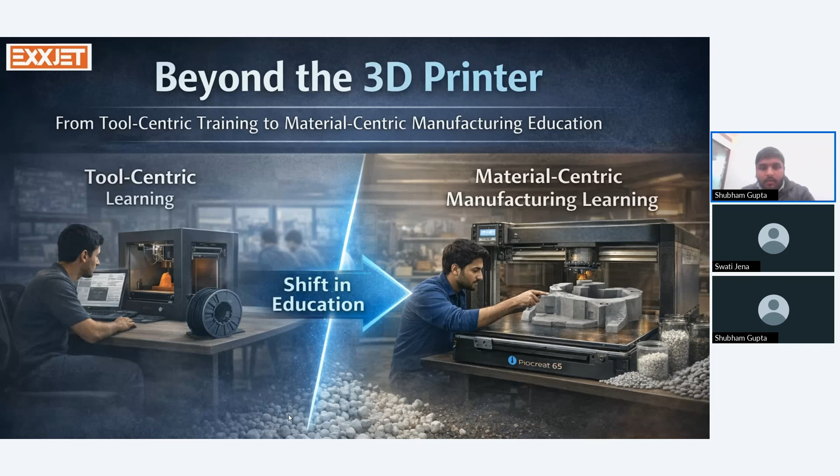This is 3D printing in education. Today's scenario is a very common sight across institutions. Many colleges have already established idea labs, fab labs kind of facilities, and usually such facilities have one, two, or sometimes more small FFF 3D printers. Within this setup, most engineering students learn about basic machine operations, like loading material into the machine, and applying different slicing parameters.

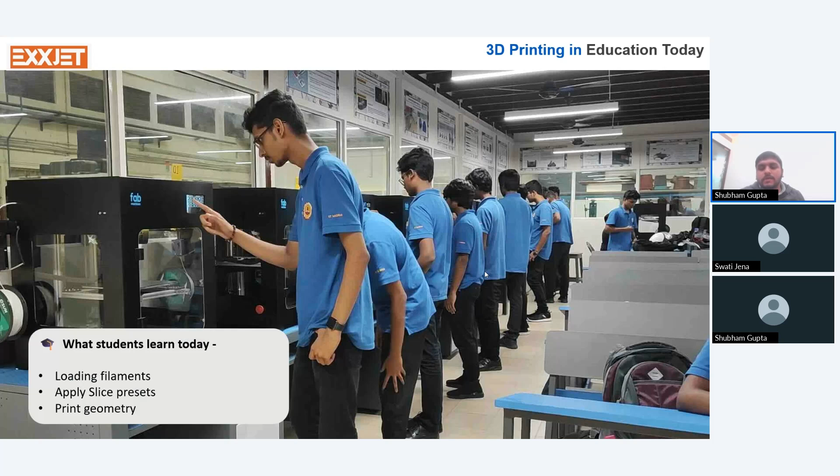So depending upon the slicing program they are using, they do basic printing of basic geometries. But what they're missing is also a very important point here. They never get a chance to handle the basic raw material, the feeding material which they are giving into the 3D printing machine. They never get a chance to handle the raw source of that material. They don't really see how the material behaves under different printing processes. If they change a certain extrusion rate or printing parameters, what kind of material behavior changes happen—they never get a chance to experience that.

And even when a print fails, the discussion usually stops at: okay, change the print settings, change the orientation, see the different support structure options, and reprint it. They never get a chance to think about what to do with that failed print. This is where the learning gap begins.

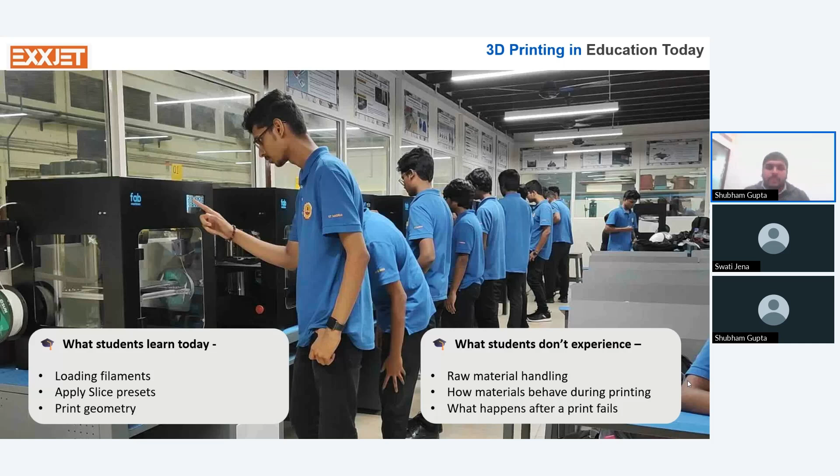It could be a general purpose material like PLA, PETG, or sometimes ABS. And the focus remains limited to design and geometry-centric learning. What that means is they print the part with predefined materials, they evaluate the part based on the application—and the application could be physical form and fit of that particular part, sometimes it has to fit or assemble into another component—and in the end they discard that particular part. So everything is limited, and there is a limited approach towards material interaction.

On the other hand, if we are talking of manufacturing-centric education, the input material starts at the raw material level, the raw source of that material, and students understand the material behavior and the processes through which the material is processed during fabrication. They are also able to understand the printing parameters plus the reuse application of that particular part, and how they can reprint with that same material. So the reprintability, the reuse, the recyclability—what we call a circular learning approach—they are able to understand in manufacturing-centric education.

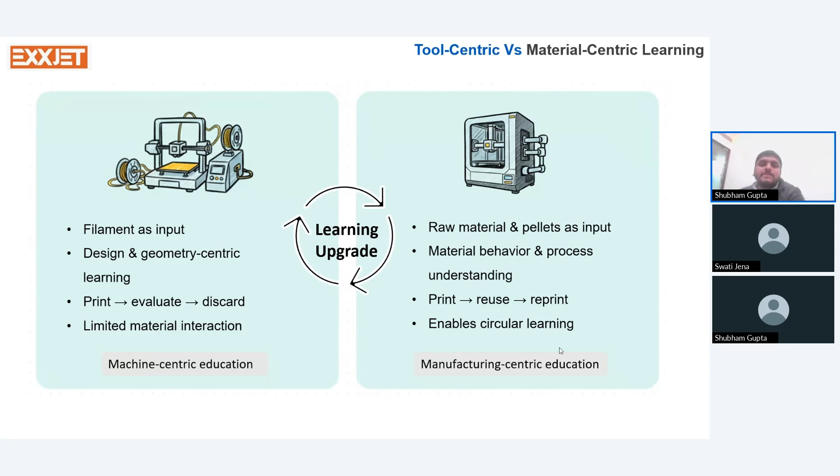So we call this transition a learning upgrade from tool operation towards manufacturing understanding.

Now let's understand why filament limits the learning opportunity. Filament-based 3D printing is excellent for rapid prototyping or for giving students an early exposure to the additive manufacturing field. It is a very good technology to start with.

However, if I consider the educational context, filament comes with a limitation. The material used for printing is already in a processed form. Its composition is fixed. It has its own data sheet, made by testing a particular specimen at certain conditions. So everything is pre-processed, everything is fixed.

Because of this, students interact only with the final form of material. They never get a chance to check the raw material quality or the different parameters in the raw material. So they don't get an opportunity to study how the raw material behaves during melting, or how processing decisions affect the final performance of the part.

As a result, the learning experience becomes largely geometry driven, as we discussed in the previous slide, and most of the time the focus of students is on printing capability - the print should be successful. Students learn how to make that part print successfully, but not why the material behaves the way it does in the printing process. Because real world decisions are driven as much by material capability as by understanding of the processes. So understanding material science in manufacturing education becomes so important today.

To address all these limitations, we need to adopt a material-first additive manufacturing approach. Imagine if instead of working with pre-processed filament, like ABS, PLA, or PETG, students could directly feed raw material into a 3D printing system. This is where material-centric learning truly begins.

In fused granule fabrication technology, which we call FGF technology, students work directly with plastic granules. It is the same feedstock material used in traditional injection molding or extrusion-based manufacturing processes. So instead of starting with a pre-processed filament coming in a specific composition...

...they can observe how the material melts, flows, and behaves during extrusion processes at different temperatures, screw speeds, and extrusion rates. This whole process allows students to understand material behavior, process parameters, and manufacturing logic, not just print a geometry. So FGF, fused granule fabrication technology, transforms 3D printing from a prototyping activity into a true manufacturing learning experience.

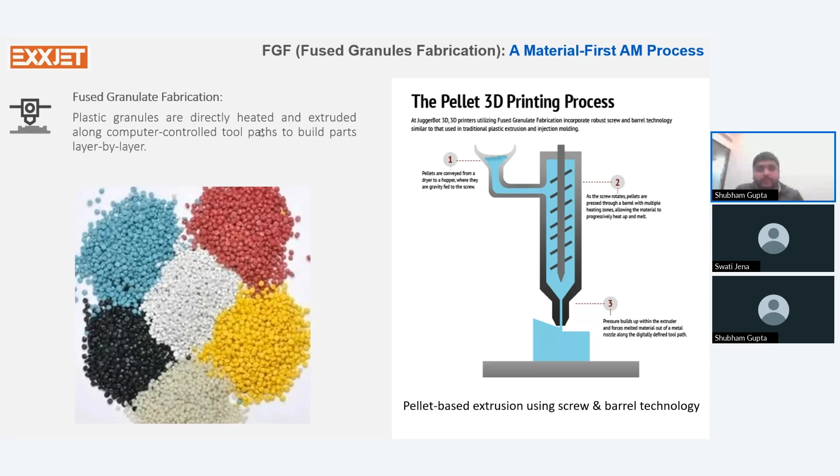There is also a specific use case of pellet-based systems for material science education. As discussed, in pre-processed filaments the material composition is fixed, as you can see in that image. So students have very limited control over additives or material iterations.

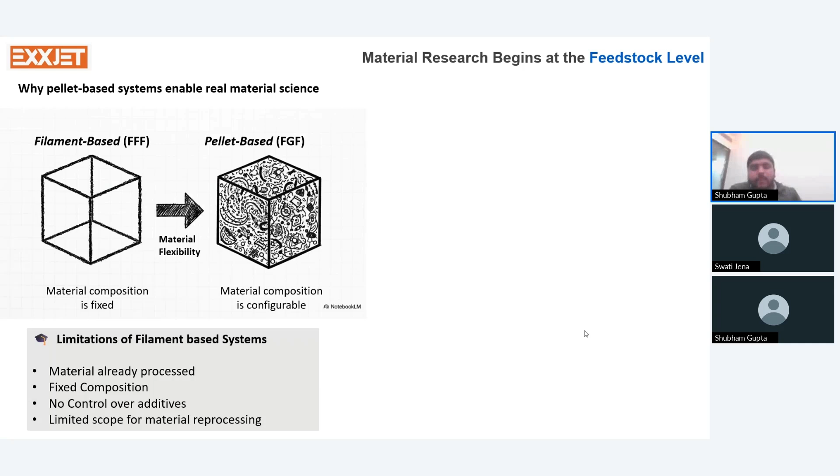In contrast, a pellet-based system gives direct access to raw material, additives, and recycled materials. This allows students to study melt flow, shear behavior, and thermal behavior, experiment with blends, and gain exposure to real industrial polymer processing.

For example, a student can use virgin material and recycled material in a controlled ratio and study how recycling affects material behavior and part performance. This could be one use case, or a separate project for any student or faculty.

Other than that, students interested in experimenting with fiber filled materials can reinforce a virgin polymer with reinforced fiber - again a project-based activity to work on reinforced materials.

A third project activity could have students work directly with real waste streams to understand the challenges of sustainable manufacturing. These are three general examples, but there could be multiple different use cases with a pellet-based system where a student or faculty can develop their own material by mixing different materials at a precise composition level, defining parameters and properties for new or advanced applications - this could be one activity to work with pellet-based systems.

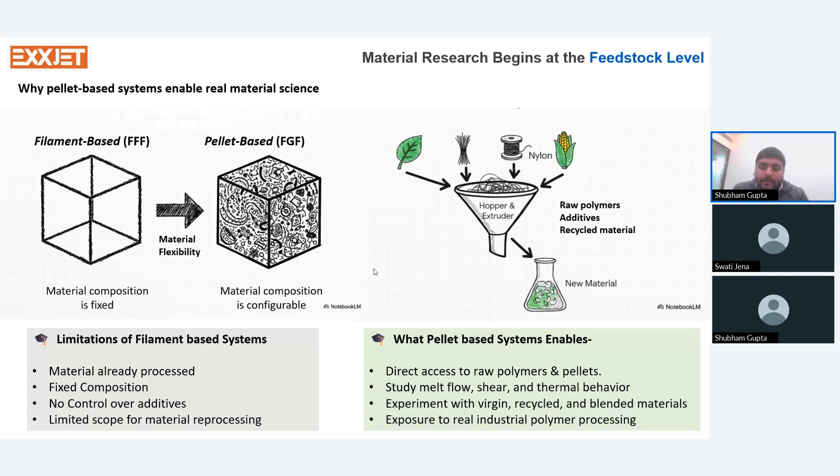Now, this is another of the most overlooked questions in 3D printing education: what happens after the printing? What happens once the part gets printed and the project is finished, or what happens to a part that failed?

In most discussions, the answer is simply nothing. The part doesn't go back into the process. We cannot use it as a learning input. It simply becomes waste.

Everyone often describes 3D printing as a less wasteful manufacturing process because unlike traditional subtractive methods where there is a block of material and we are cutting the material away from it wherever it is needed, in 3D printing, generally the material addition is happening layer by layer. In principle, it is true. But in practice, 3D printing itself also creates a lot of waste in the form of multiple failed prints, support structures during every print job, purge materials, test samples on a regular basis, and prototypes which never get used.

So even though we call it a sustainable technology, the reality is it contributes to the global plastic waste challenge. Let's understand the numbers, how 3D printing is contributing to plastic waste. First of all, there is no actual end of life defined for 3D printed parts. So most of the waste, whether it's support material, a prototype, or a test print, never gets recycled. It simply ends up in the landfill.

I have some numbers from a global report from 2020. Almost 18,000 tons of plastics were consumed by the 3D printing industry. This number covers all technologies, be it FFF wire-based technology, resin-based technology, or powder-based technology. Out of this, if we consider one third as waste in terms of printed prototypes which are not getting used, almost 6,000 tons of failed prints or discarded materials are considered 3D printing waste. And remember, the 3D printing material industry itself is growing 25% every year, so the waste is compounding rapidly.

So even though we call 3D printing an efficient process, we still have a growing waste problem to solve here.

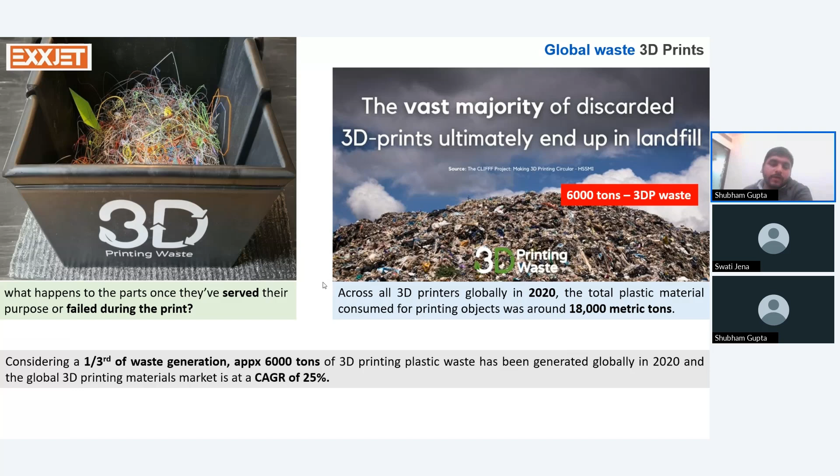In reality, achieving zero waste 3D printing is almost impossible. And when waste cannot be avoided, most people think let's recycle it. It sounds great in theory, but when you look closely, filament recycling is not as straightforward as it seems. The process involves multiple stages: cleaning, sorting of the waste material, remelting the plastic, extruding it into a new filament, and testing every batch. Even then, we can still face issues like quality loss, material contamination, or scalability problems.

While recycling is an important factor to consider, it is not as practical or efficient at scale. That's why we need to start thinking in terms of a circular economy, where waste is not just managed but reused directly as feedstock for new prints. This is where the pellet-based 3D printing approach truly stands out. It skips the whole manufacturing of the filament, allowing you to recycle and reuse the material directly and efficiently into your 3D printing system. By eliminating the filament making process, we are not only reducing plastic waste, we're reducing cost and material waste, and also opening the door to using industrial grade and recycled polymers right into the printer.

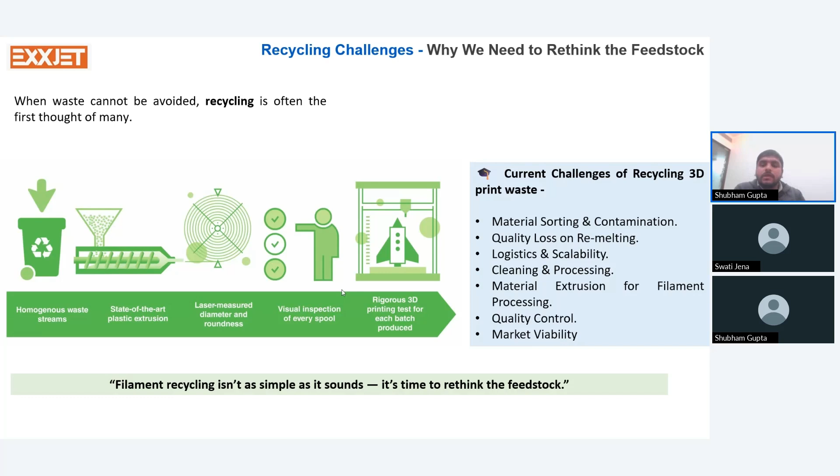There are a lot of applications we can open up with such a scenario. The PioCreat system does not just print, it completes the entire cycle of reuse.

Let's consider sustainability through pellet 3D printing. Whatever the waste model is, your failed part or leftover plastic, it goes into a crusher, gets pelletized into small crushed plastic elements, and then becomes the input of your same 3D printer. Whatever the crushed plastic elements are, you can directly feed them into the 3D printer, and it will get melted and you can reuse it for your other project activities. The entire waste becomes the input source of your new 3D print, and it eliminates the whole process of filament making.

So consider now such a setup in your lab. Your lab becomes a mini micro factory, which basically, if it is generating waste, you are recycling it in some other way.

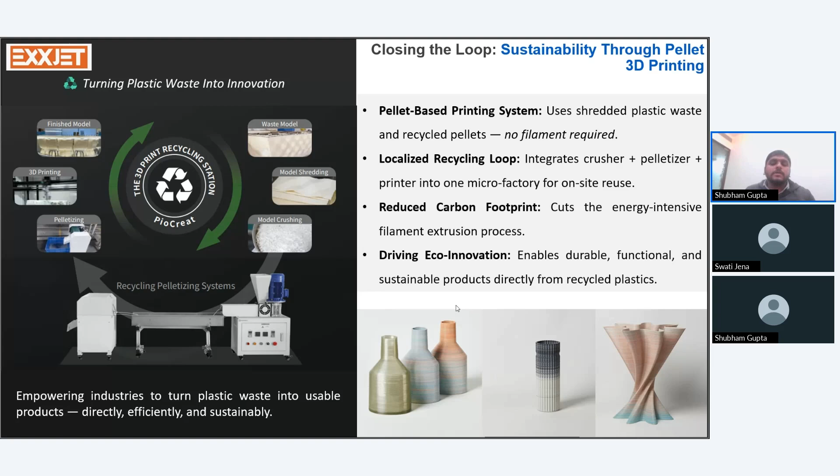This whole process can eliminate the need of filament extrusion, reducing the cost as well as carbon footprint. Along with that, it is not just a product but a solution with purpose, empowering industries to turn plastic waste into a usable product. I have a video here with a similar use case where recycled PLA material has been used.

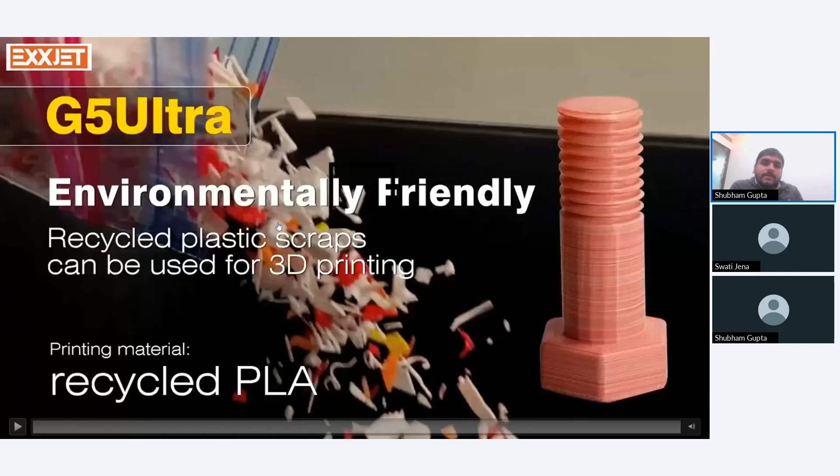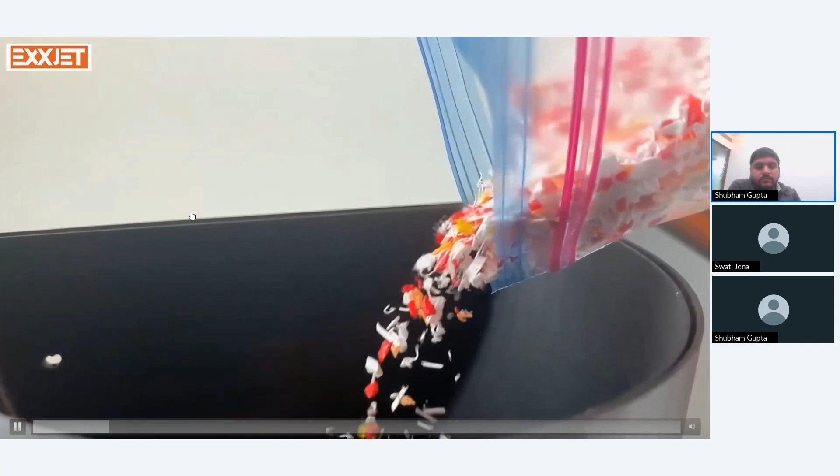In a time where we strive for green and sustainable solutions, we've chosen the G5 Ultra. Prints any part we need at high speed and with stability. We're using RPLA recycled material, a reusable and degradable eco-friendly material. It's not just a choice, it's an attitude, a respect for our planet.

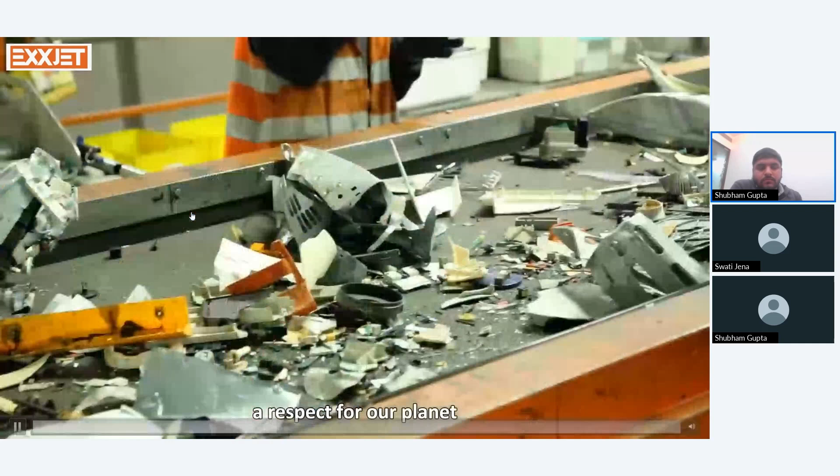But the potential of G5 Ultra isn't limited to this. It can print a variety of recycled materials. This is our future, this is our responsibility.

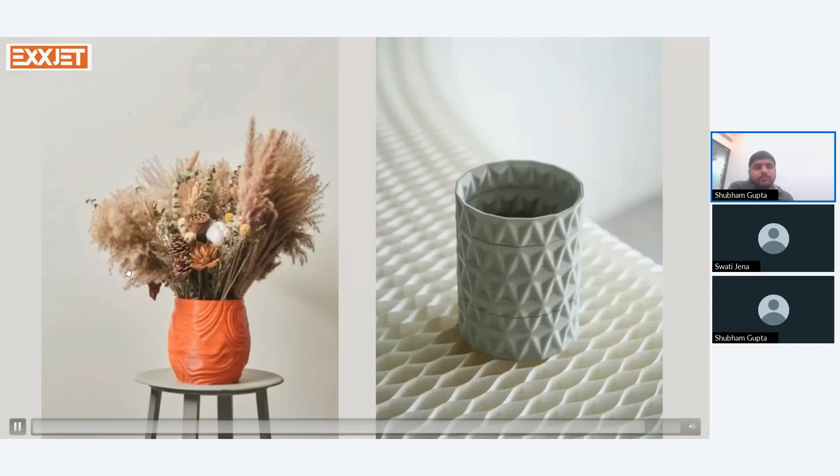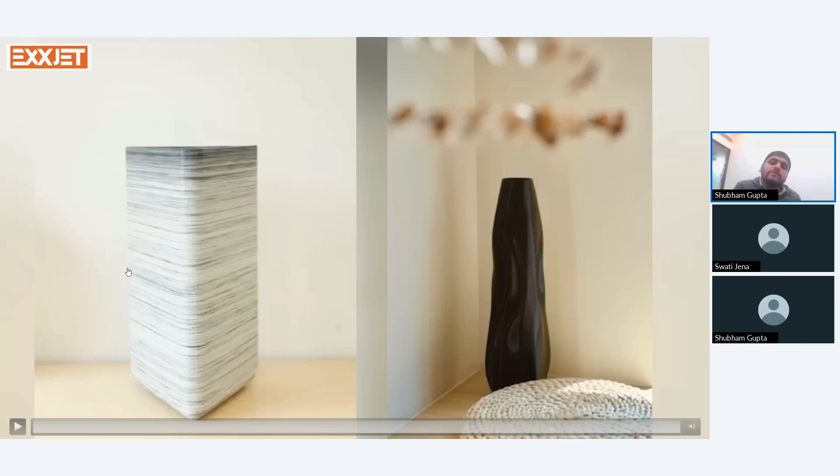So this is the company which used almost 1,000 kg of recycled or waste product, and turns it into a recycled material which becomes a useful product for other use cases. This kind of project activity could be done in an education scenario where a faculty along with a team of students does similar activities, or if you have a lot of waste prints, you can turn it into a micro factory as discussed in a previous slide, using those waste prints as a feeding input for your next new applications.

So the setup or solution we are talking about here is from a company called Piocreat, and the model is G5 Ultra. If you can see the image here, the system looks like this.

There is a hopper on the top where you will feed the raw material. It could be in the form of raw pellets, or crushed particles of the plastic waste material we are talking about. It has a certain storage capacity, and through the feeding tube, all those pellets get fed into the extrusion system.

The extrusion system here is called a screw-based extrusion system, similar to the injection molding screw-based mechanism we have seen in traditional processes. With the help of a heating mechanism, it has multiple heating zones, which I'll show in a coming slide. The nozzle can reach up to 420 degrees Celsius.

Depending upon the type of material and the slicing settings a user has done, the material will start melting. It first gets pressed through a barrel, and with the multiple heating zones, that material is allowed to progressively heat up and melt. The pressure build-up within the extruder forces the melted material out of the nozzle, and layer by layer the printing happens depending on the geometry and orientation.

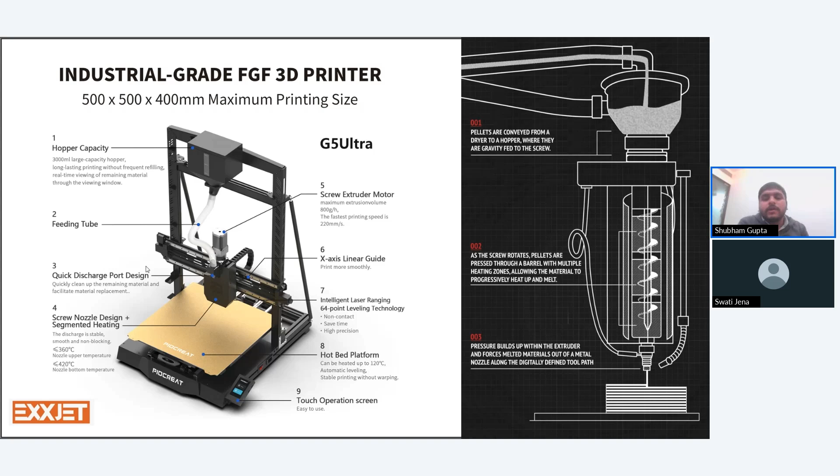Other machine parameters: the nozzle temperature we discussed, maximum 420 degrees Celsius, enables printing of engineering grade materials such as polycarbonate, PA, or composite materials like carbon fiber and glass fiber. You can even mix different virgin materials with composites in a controlled ratio to define your own material for certain applications.

It offers a good build volume of 500 by 500, which is not only used for prototyping, but you can also print functional parts, molds, or large scale prototypes depending upon the application. I have one more video to showcase the type of models printed on a pellet-based system.

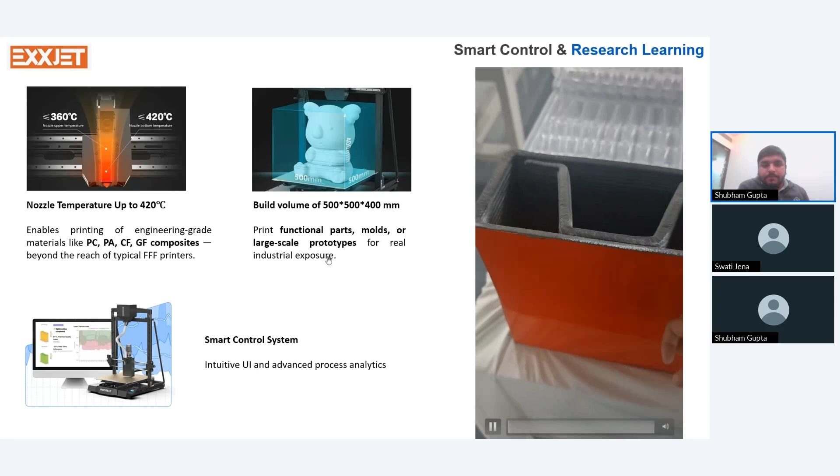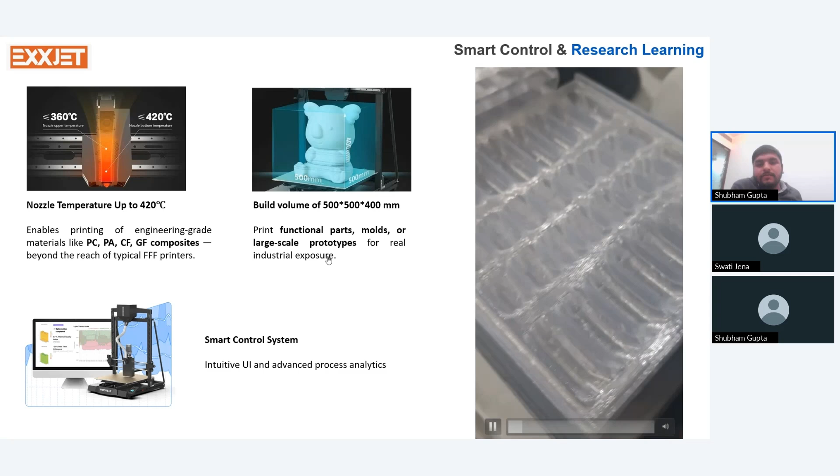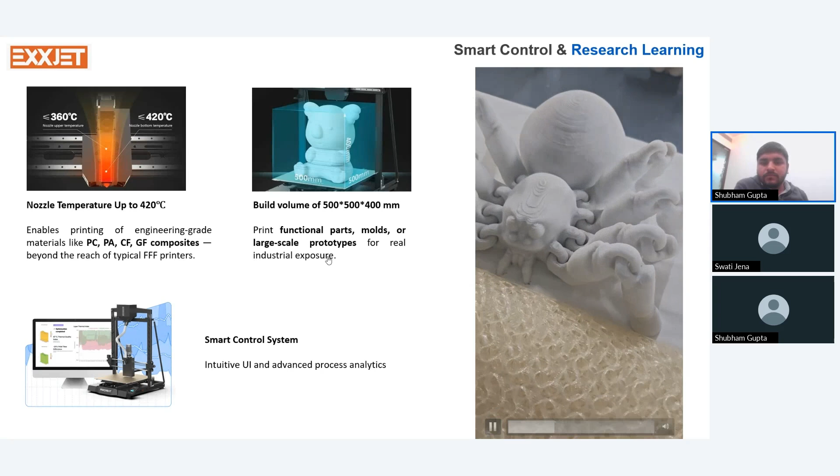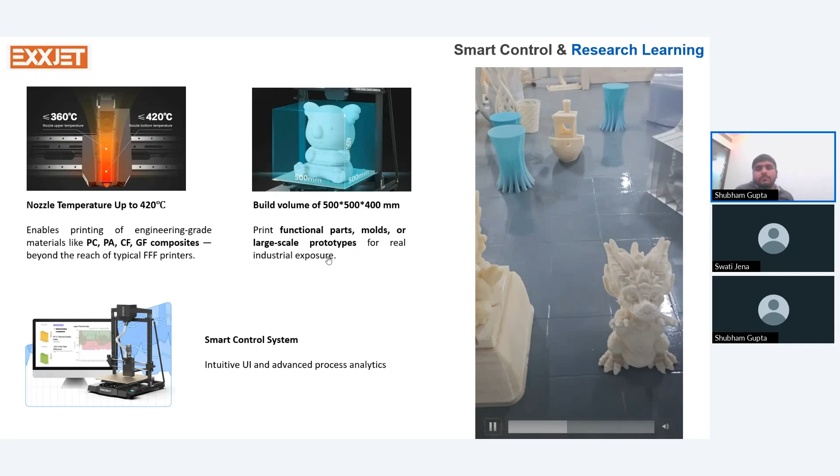This material is ABS with carbon fiber. Here is PETG, which is recycled PETG. Carbon fiber materials, again a composite material. PU, the flexible elastomeric material. This PETG. TPU. Here's the details of printing. Lamp.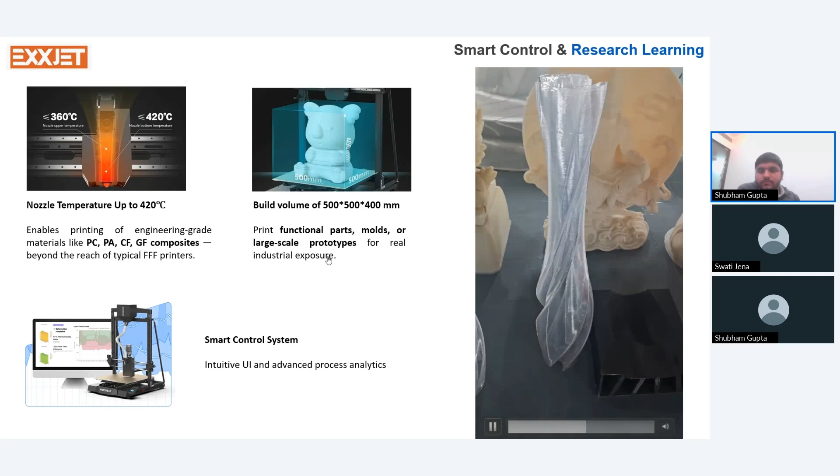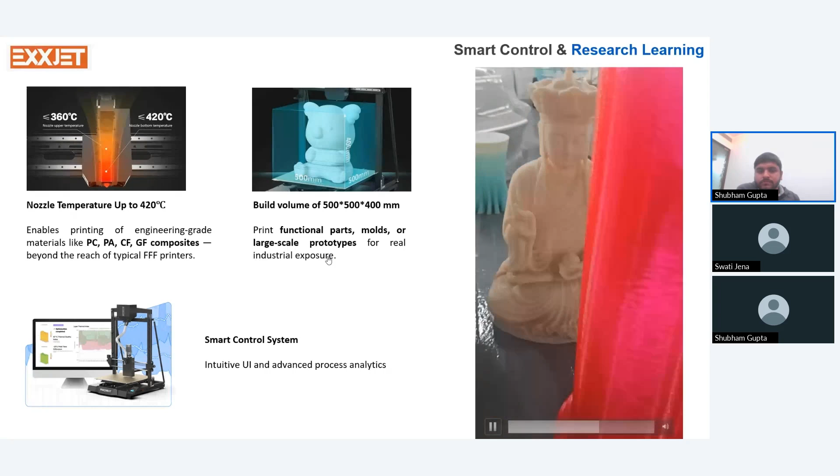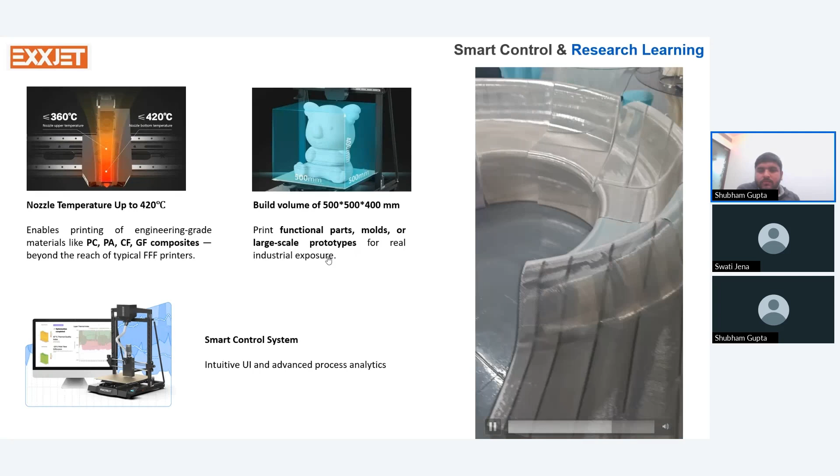Colorful chairs made from recycled PETG were exhibited by our clients. Some of the sculpture models and sculptures.

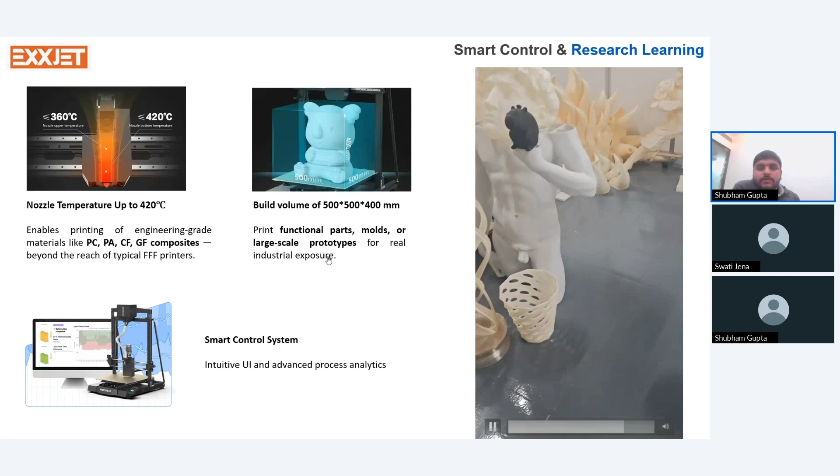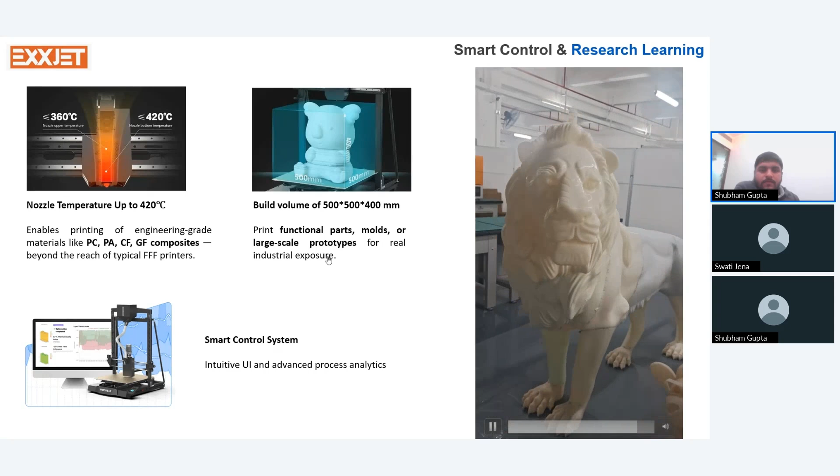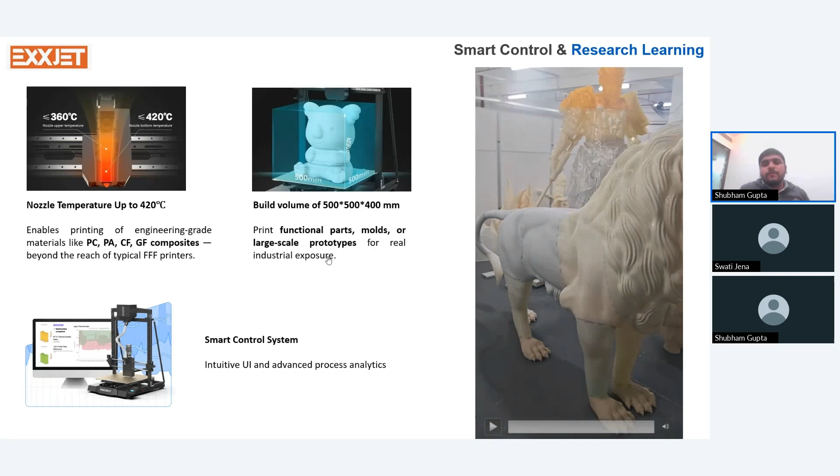Printed in different parts and assembled. This video explains the different models in terms of build volume and the different materials feasible to print with such a pellet-based 3D printing setup.

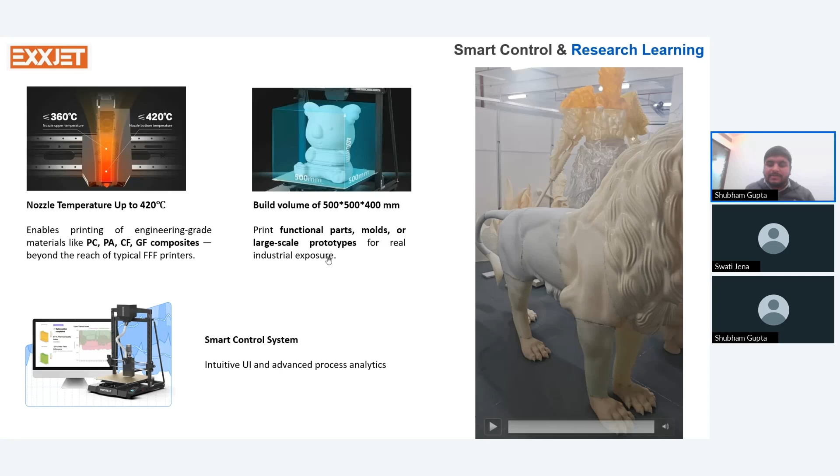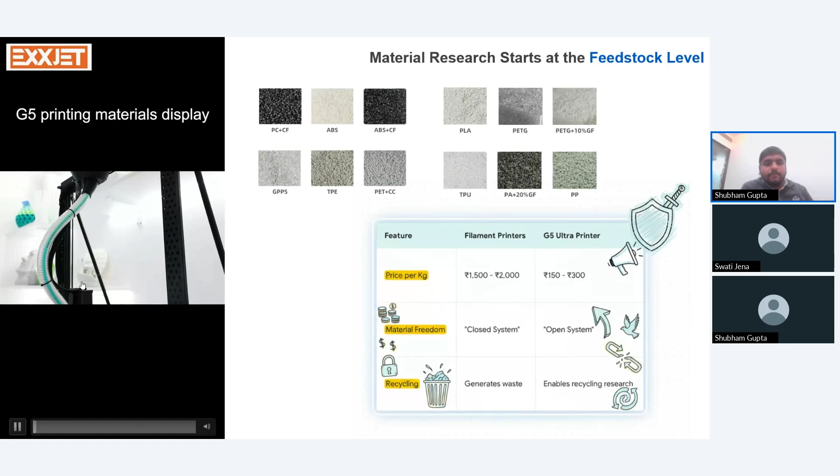Other than that, there are other different materials which are able to successfully print on such a setup for research purposes or general purpose applications. So this video will describe the list of different materials which have been tested, like ABS carbon fiber,

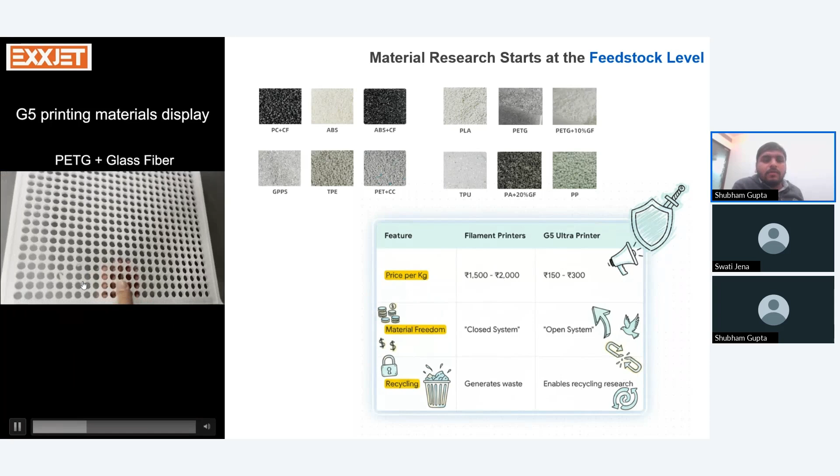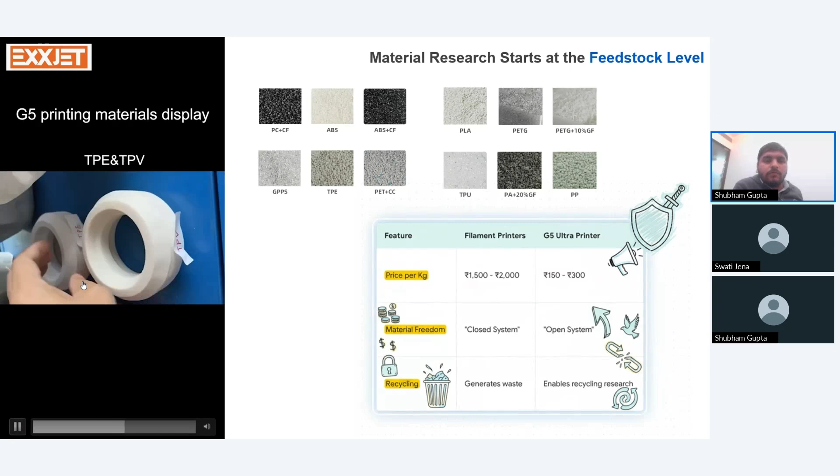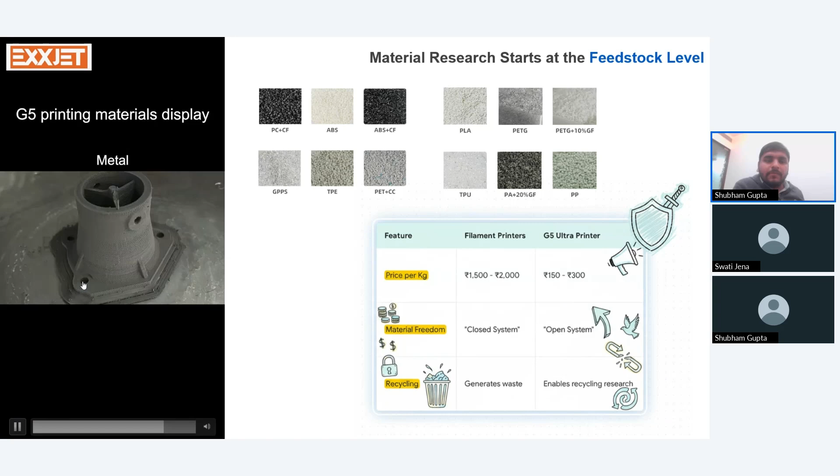PETG blend with glass fiber as a composite, the standard PLA material in multicolor, TPE, TPV type of material, TPU for flexible applications, metal, alumina, zirconia kind of stuff.

Why? Because the temperature of the nozzle could reach up to 420 degrees Celsius, which is generally not available in desktop FFF machines. Generally FDM FFF based 3D printers come with a temperature range of 300, 310 degrees Celsius and are limited to materials like ABS, PLA, or PETG.

Here you have the opportunity to work with the raw feeding material, which is traditionally used in manufacturing processes, and to make a blend of those materials in different controlled ratios so that you can define your own material for certain applications.

So comparing filament printers versus pellet based printers, definitely the price of the filament or raw material gets reduced here compared to what is available in the market.

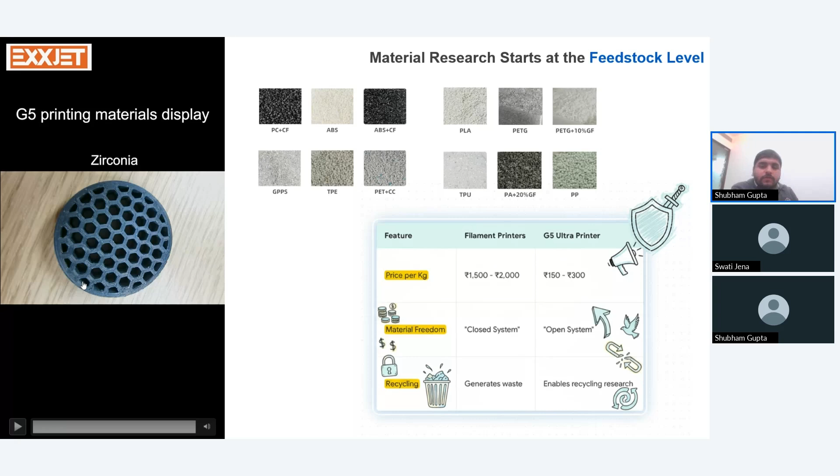There is material freedom, a completely open based system where you can blend different materials and test it out. Recycling or sustainability, where you get a chance to do recycling research on your waste material. So these are a couple of use cases or advantages of the pellet based system over the filament based systems traditionally used in the education industry.

So what does FGF enable in an education scenario? These are the 5 points which we have discussed so far in our slides. I'll just quickly cover it.

The first is the opportunity to directly use granule material, which is the same feedstock used in injection molding or extrusion based processes. The second advantage is that it enables hands-on research.

So in process engineering or material sciences, students and faculty have an opportunity to work on their own newly developed materials by mixing certain materials. They have the opportunity to work on it as a project activity.

The third advantage is material cost reduction up to 70% compared to filament based printing, which is the generally available traditional material in the market.

Scalable due to the large build volume. General build volumes of FFF machines are in the typical range of 250mm cube, 300mm cube. Here you get a massive build volume of 500 by 500, so that you can support large parts.

High throughput also. By high throughput, I mean generally FFF machines come with a nozzle size of 0.4mm, which is a very standard size.

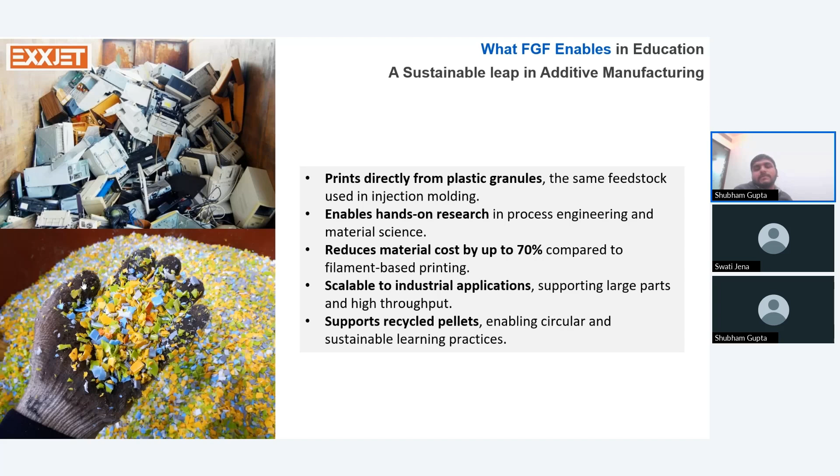Beyond academics, pellet-based systems are being used in industry as well for multiple applications. Prototyping is a very common application in 3D printing, be it any machine. Prototyping remains the first and major application in additive manufacturing.

Other than that, tooling patterns, since they are also bulky and big in volume and size, jig fixture applications, production scenarios like furniture also we have seen in the video.

A couple of medical applications, patient-specific assistive devices. There are certain medical machines as well as medical materials in the form of raw pellets available within this pellet-based system, which can be used for medical-based applications.

So likewise, there could be multiple project activities in education scenarios where you can work jointly with industry, or the students and faculty themselves can jointly work on a project with different application scenarios.

So why choose FGF pellet 3D printers? Cost reduction during printing because of raw material input, shorter lead time because of faster throughput, high throughput through the pellet-based system, excellent material properties, and the opportunity to work on open source platforms to develop your own materials without developing the whole filament process.

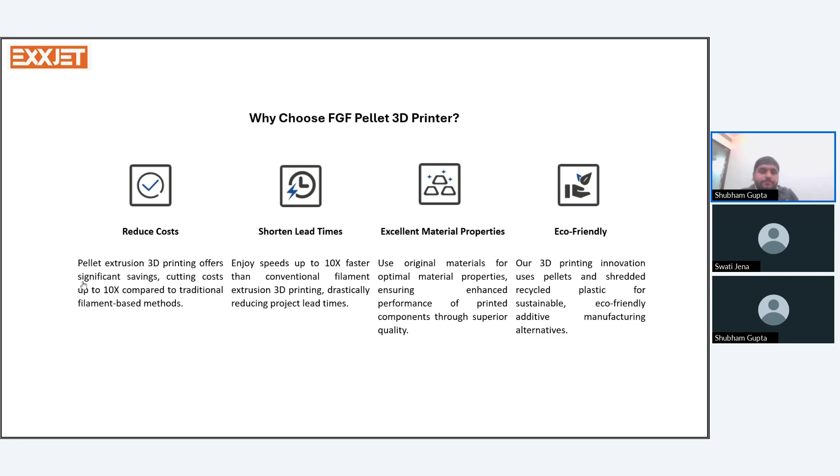Before we close, I would like to briefly share that additive manufacturing is just one part of the solution we offer. As a company, we work closely with educational institutes to support the entire digital manufacturing and Industry 4.0 learning platform. This includes design and simulation platforms, 3D digitization and scanner options, additive manufacturing in terms of multiple technologies, collaborative robotics, and automation and autonomous system training. Our objective is to help institutes build an integrated learning environment based on their curriculum goals, student skill levels, and future industry requirements.

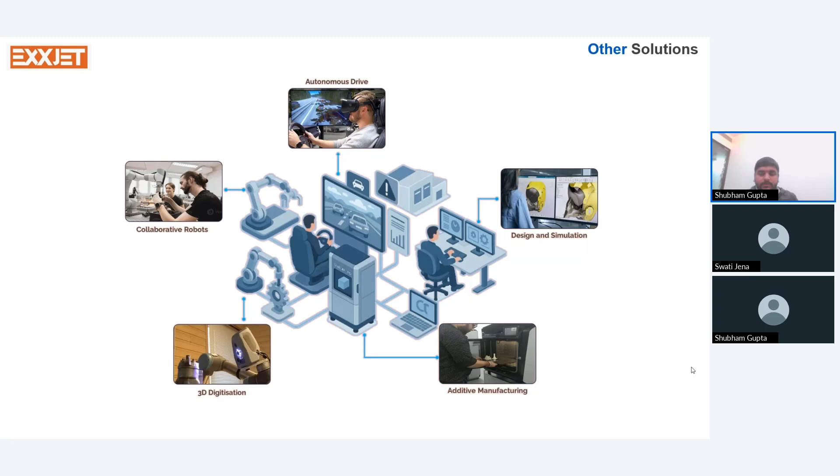Thank you for your time and attention. I would like to leave you with one key thought. Additive manufacturing in education should go beyond teaching students how to operate a machine. It should help them understand the materials, the processes, and the manufacturing behavior, because that is how real world engineering decisions are made.

A material-first approach allows institutions to transform 3D printing labs into manufacturing research and sustainability learning environments. Whether it is introducing students to raw material, enabling a circular learning approach, or preparing them for industry or research goals, this shift adds long-term value to engineering education. Once again, thank you for your time and attention. I will now be happy to take your queries, if any.

Yes, Shubham, there are some queries. Mr. Vedant asks: will it make an even weaker material? I did not understand your question, sir. Will it be able to make a weaker material?